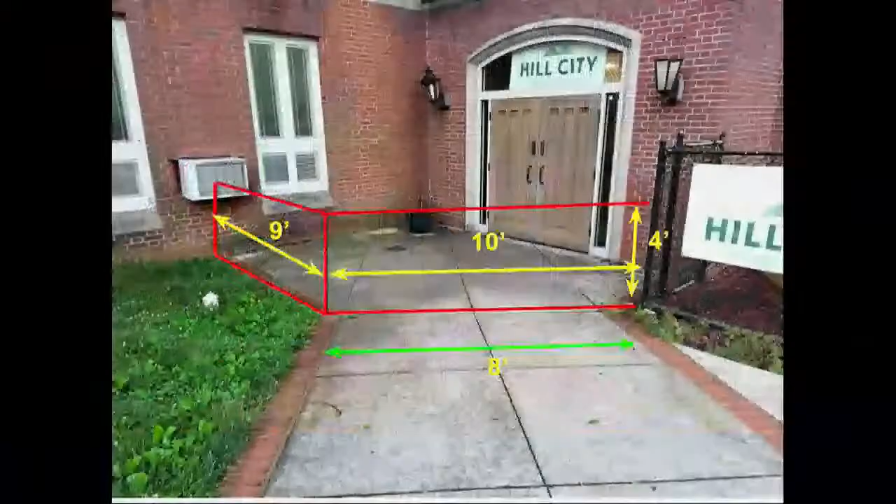And then you have a second request, to extend a fence and close a wall opening on Rivermont Avenue. Yeah, this is at our property at 1301 Rivermont Avenue. We have the tenant Hill City Montessori School in this part of the building, and they've had several instances inside the wooden doors here — that's an alcove, there are electronically locked storefront glass doors inside. They're trying to get kids through two sets of doors, and several kids have just run past here. There may be an overhead view — this is right at the corner of Ruffner and Rivermont, and in the blow-up on the right is where we'd like to put a corral for the children, just to keep them from running out. I would like to do just a 4-foot fence; I think the existing chain link fence is 5 feet.

And have double gates there because this is also an ADA access area, so we want to be able to accommodate that requirement. The patch up the hole request is to remove that old air conditioner from between the windows there and just brick that up with matching brick as close as we can.

Yeah, the material of the fence is chain link. It's exactly like what's there, it's black chain link. He's already changed it there. Anything else put there would look awkward, I think. It is going across the front of the building.

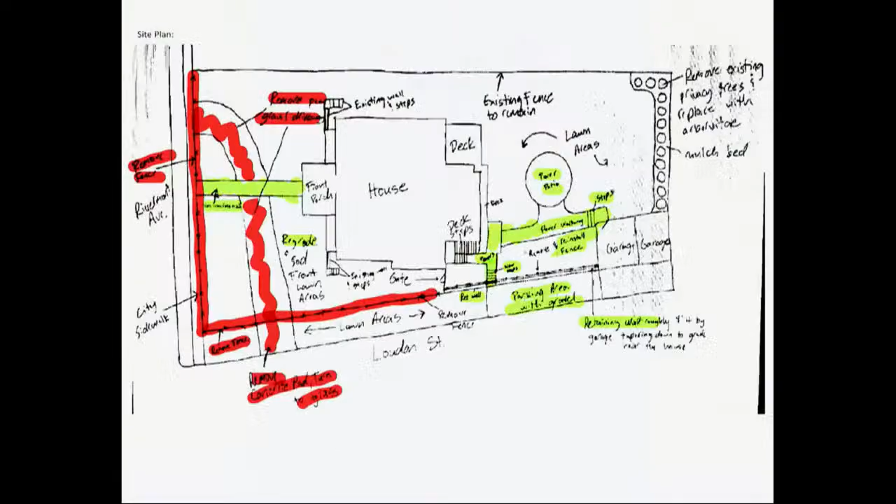Part of the reason we want to have some steps that go from the back of the house down to Loudon Street is because what's there now, there is a gate there, but when you go out the gate, if the grass is a little bit wet from dew or rain, both my son-in-law who lived in the basement and myself have fallen down on that slope because there's literally no steps there.

Historically, there were steps that came out of the back of the house. There was a small porch there and went straight down to Loudon Street. And at the far end, or I guess at the Rivermont end of that concrete wall, there had been some concrete steps that were probably removed at the same time the concrete wall was.

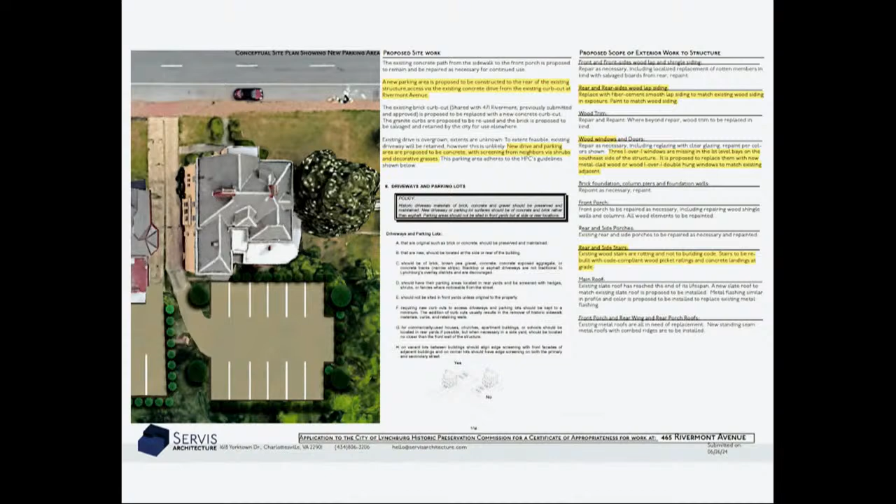And I think that's it, right? Oh, and then the paint colors, of course. I'm really concerned, I like the washed out look this house has had for the last 25 years, we see no details whatsoever. Why would you want to actually show off all the wonderful details? I don't get it. I know.

It's the funniest thing, I ended up using a tan that's not so far off the existing yellow. No, it's not. It's funny. It's very funny, I saw that. But I sort of like it. It's a little nod, and I think it works.

And the red one in the background there that I'm sure you've seen the last couple days has started to get painted. I think they'll play off of each other really well.

Everything you've asked, to my mind, is stuff we've asked for with other buildings that we've approved. Painting up this house, this has been a house I've been praying that someone would do. I believe something, one that you were on the board, yeah, you asked about this house, and I was like, it's going to be the last one.

About a decade ago, were they there? Repainted it the same color, the same way. And because I saw had a paint crew out there, I was very excited, yes, until they did exactly the same thing.

I make a motion, I mean, I don't want to cut off any conversation, I'm already talking too much. I would make a motion to approve as submitted. This is what we've done over and over again on these houses, and he's doing it the right way. You're doing it the right way.

I'll second. Okay, any discussion? Okay, all those in favor say aye. Aye. Great. Opposed? Okay, good. Thank you. All right, next.

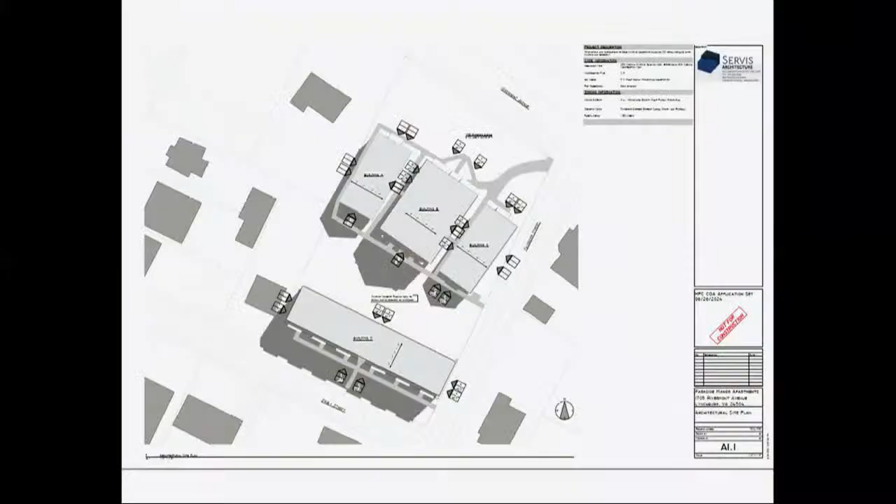So this is a little different. This is amazing. This is a non-contributing apartment complex a little further up Rivermont. Four existing structures that are all painted CMU block.

And so we're sort of still in the design phase, but I think we want to make sure that we have your all's blessing on the outside before we sort of dive too much into the overall.

But we're essentially redoing, there's 32 apartments right now. There'll still be 32 apartments. We're planning on cladding all of this with new lap siding and shingle gables, tearing down the concrete motel-style porches and trying to reconfigure the circulation inside to get to the upstairs apartments.

So that we can make them more individualized porches for the different units. And then in keeping generally the windows and doors, we have to add a few doors, but then keeping the windows where they are, but lowering the sills to put in bigger windows and get more light into the units.

And everything site-wise will be minimal, repairs to existing walkways and parking and everything.

As bad as the buildings are, the landscaping is actually halfway decent. It was sometime about a dozen years or so ago that they repainted it the way it's painted now, and they added a lot of that landscaping in, which definitely softened the look of the concrete block buildings.

That's yeah, okay. Having gone through all the bright and bold colors on Rivermont, it doesn't feel right here. Even though this will be an improvement, I feel like it needs to be a background building on Rivermont. So I wasn't trying to do anything too bright and bold. It's sort of like a taupe body with some blue accents and white trim.

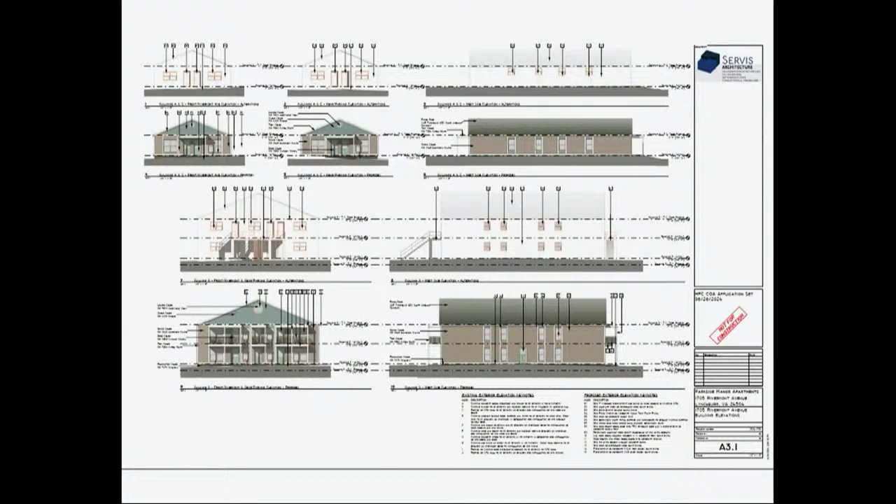Are you looking for neon, Eve? And the roof is what color? The new roof will be shingles, just like a charcoal gray, charcoal slate gray. I think I said charcoal or slate, I'm not 100% sure. Well, it's 1973, shouldn't it be avocado green and harvest gold? At least the interior should be.

And I do think the software for these renderings sort of mutes the colors a little bit more than when I do it in Photoshop, which is different.

Well, anything is an improvement. So I think the tan could be a little lighter, but okay, and we may look at it and come back. We'll provide a little more contrast with the roof, but I mean, obviously we just want... anything would be an improvement. I think the muted idea is a good idea.

So do I hear a motion? I'll make a motion to approve as submitted. Is there a second? All right, any further discussion? All those in favor say aye. Aye. Opposed? All right, Casey, thank you. Thank you all so much.

Encourage Tony to buy some more of those houses down there. He's got enough other stuff right now.

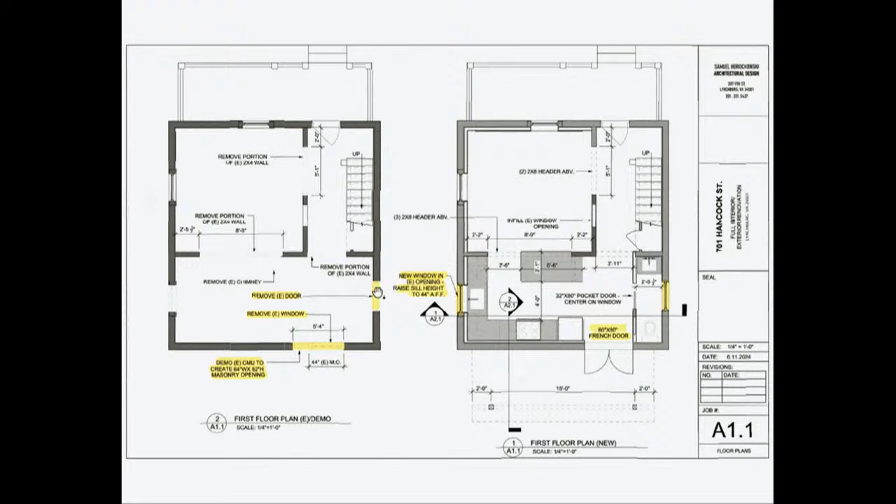The main thing is, the rear door is currently on the side of the building in the back. We would like to put it in the actual back of the home, as you can see there. So you have our interior demo plans and what we would like to replace it with. I can come up and show you.

So this is the current rear door. We would like to place here a French door at the actual back of the home. The door here would be turned into a window for a bathroom. The door that's there now, we would convert it to a window for a half bath.

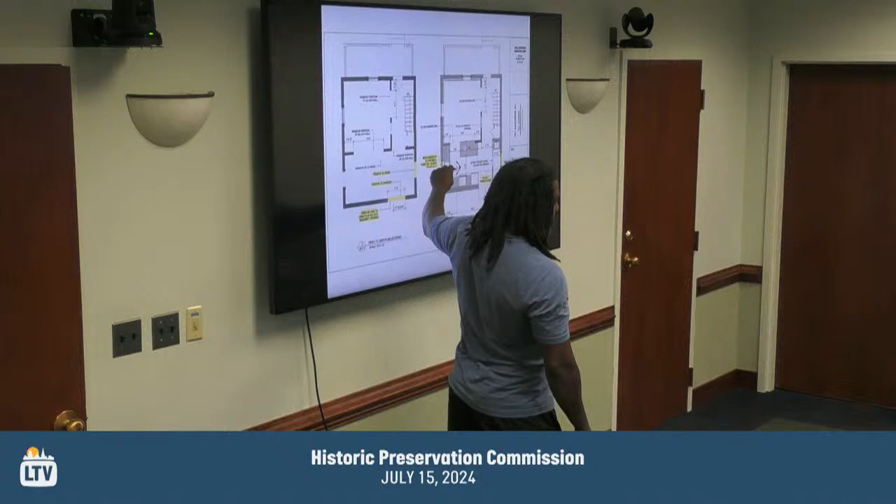This window is actually where the kitchen sink will be, so we're just asking to shorten it. And if you can go to the upstairs.

There's a window here upstairs. I don't have to remove it. This is the architect's idea, because this is where the bed will probably go, but I'm fine with not having to put the window in. The window here, we want to put a full bath there. As you can see, the wall runs right into the middle of that window, so we would like to close that in to be able to get a full bath upstairs.

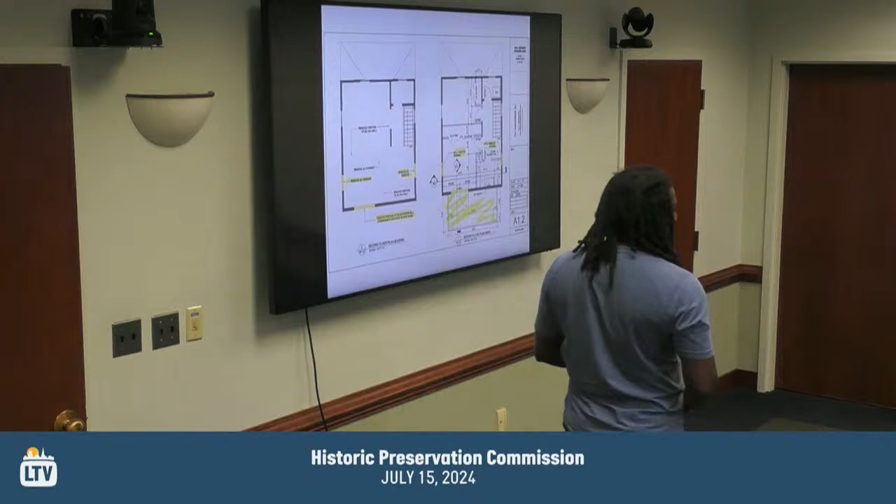Yeah, that's pretty much for outside windows and doors. So I was a little bit confused, I don't know your materials, or did I miss all of that? So about what the windows would look like, what the door would look like, right.

So if you can go back to the original picture of the home as it stands now. When I bought the home, some work was done to it already. I'm sure they got the metal roof approved because I looked it up on the GIS, it's a standing seam metal roof. The windows are vinyl. Not my choice personally, I do aluminum clad windows, but that's what was there when I purchased the home. They are new replacement windows.

The front door would be a wooden door, and I have a picture that I sent her of my previous home on Norwood Street. It would be exactly like that door.

And the back door would be... a fiberglass French door in the back.

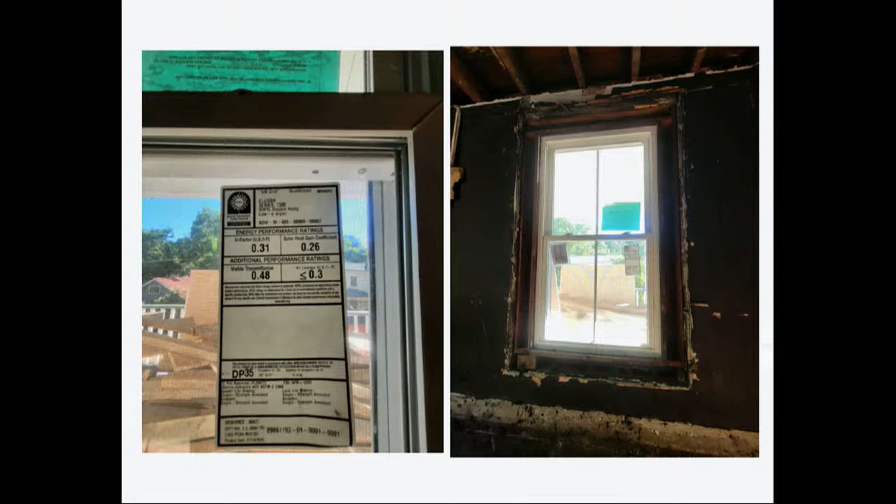And the windows you're wanting to replace, it looked like some of the original windows were 2/2. Is that what was left, from what I saw? Maybe 2/1, I can't be sure. Do we have any other picture? That one's 2/2. Are you wanting a certain configuration, or keep the 2/2? Yeah, I'll keep it like that.

So, replace vinyl with vinyl, is that what you're saying? No, I'll keep those windows. Keep what's in there? Yeah, if that's what was in there.

I just took the panes out because we were doing demo. I didn't want to damage the windows, that's why they're not in there now. Which, as you can see, the framing is still there.

So all the framing for all the windows is in place? Right. And they're all the same? Yeah.

You're talking about shortening one window because of the kitchen, on the sides, and then getting rid of one on the upstairs because of a bathroom. Is that right? Go back to that picture.

So only one side of the house is in a historic district? I want to make sure I know. One side of the street. Okay, one side of the street. And you happen to be on that side?

Right. Go back to the previous picture of the home, back one more. So this window, we would like to close in to get our bathroom. As you can see, that's the door currently, and you would close that and make it into a window, for the kitchen.

On the other side, there's a window down below that we would like to shorten, right here, for the kitchen sink. That's gonna stay the same. So all these windows are either back or side, but not front, that you're changing? Right. Yeah, I knew that, but I wanted to say it out loud, and see whether you agree.

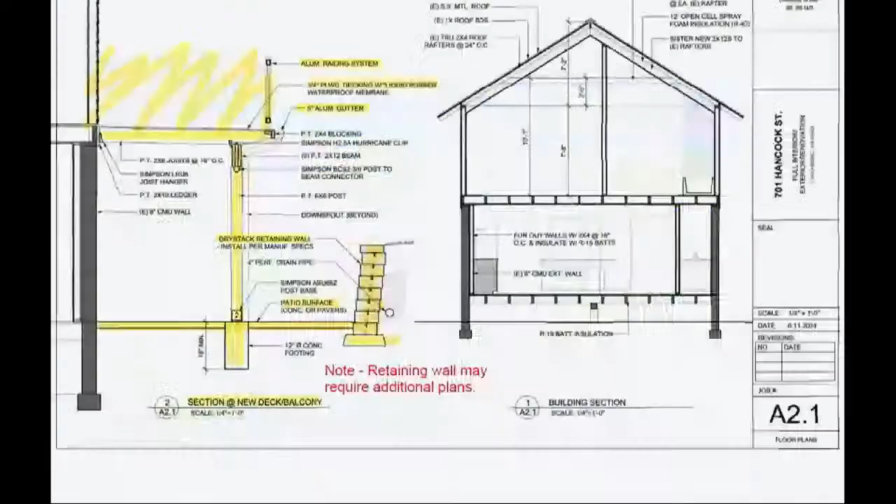Given that the front will look the same, and these are improvements to a house that has clearly been neglected for a very long time - and the guideline says discouraged, not that we don't recommend it, discouraged on the sides - I'm okay with the windows.

As far as the deck on the back, it's a little more of a stretch. I think it's a big stretch. I'm looking at the deck guidelines - it says porches are preferred to decks, but decks are acceptable at the rear facades of the building. It goes on to talk about side decks, which is not what we're considering here.

Decks should be stained or painted to blend with the colors of the building, and should be simple rather than ornate. If visible from the street, it's recommended they have square wood balusters set no more than 3 inches apart. I glanced at that too quickly - is that what we're seeing here with the balusters? Are they square?

So my problem is the second floor - it looks very modern to me, different. But I hear you, I just don't see that it - it doesn't really say anything about second floor in the guidelines, so I don't see that we can deny it based on the guidelines. Like, I hear you.